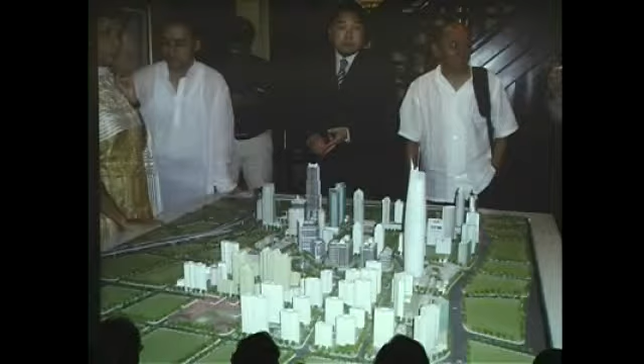Places like South Asia, Latin America, and Africa—well, this is the switch to China. China has already decided it wants to be a 20th century city, and no one told them it's the 21st century.

So it's countries like India, Latin America, and countries of Africa, through their lower use of energy and resource per capita, that are therefore more developed in a 21st century sustainable planning and design sense. But architects trained in mechanical thinking are lagging way behind.

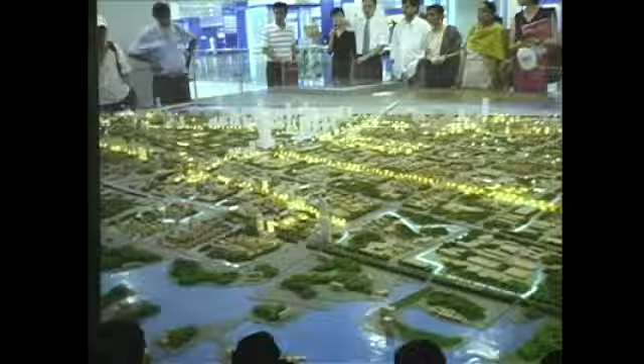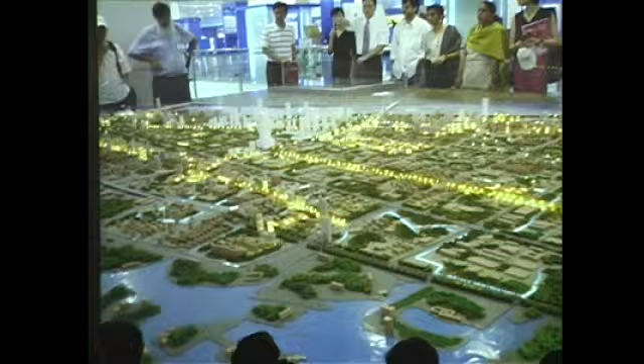How can architects participate in this enormous paradigm shift and change of modalities that will accompany what Ulrich Beck calls the second modernity? I would argue that architects must engage in new transnational scales of thinking and transdisciplinary modes of collaboration, and that's how I'd like to structure the research work I'll be presenting.

But this is the China we were shown. This is an urban management system where people with PDAs are running around the city looking for violations of public order, contributing to a huge database that's centrally managed and monitored. So this guy with his Gucci bags has to avoid the PDA and the photographers in order to continue making a living in this newly structured environment.

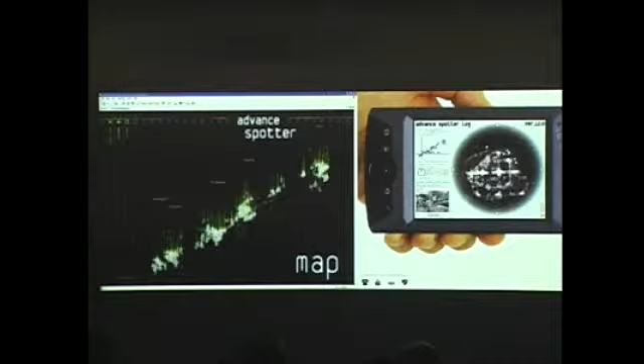This is a map of Boston to Washington. These are the tools that I think the 21st century architect has to operate within. So in order to make this leap from the handheld to the GIS reading of a region, we have to develop a theoretical framework to work with.

And so I'm a co-PI, a principal investigator within a science project with 35 different science disciplines represented, from hydrology to plant ecology to social sciences, paleobotany—there's some really interesting fields you've never heard of. And I'm the one architect on the team. They decided they wanted an architect.

And so what we're doing is developing a system for understanding the relationship to be able to scale up the community garden to the whole northeast forest. Because basically all the cities from Boston to Washington occupy a hardwood forest. When the Europeans arrived here it was intact, structured by watersheds, stream beds and watersheds along the whole thing. Every city you'll see has a river running through it.

And so this is the patch dynamic framework, the system we're working with. Of course I don't have time to get into the details, but just to give you a snapshot, the 5 color swatches you see are 5 land cover types. So it's a system that looks, instead of land use like planning has relied on before, it looks at land cover: building, pavement, bare soil, grass, and trees and shrubs. So these are the 5 land covers.

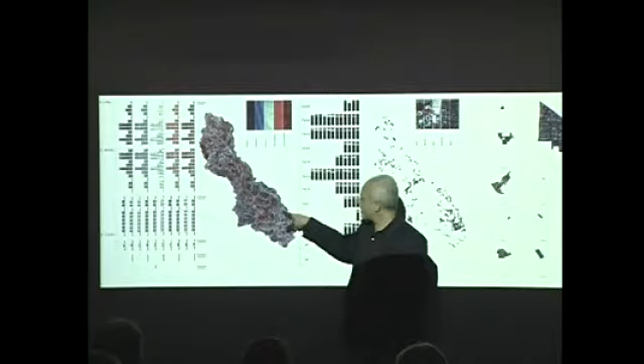And so this is a watershed, and it stretches from the center of Baltimore to the farms at the periphery that are rapidly being turned into subdivisions, big mansions. The Beltway kind of cuts through the watershed here.

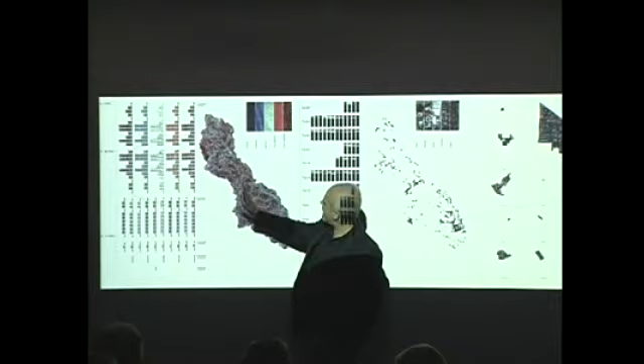You can see it cut in a straight line in half. And then there's a feeder expressway that was built more recently to allow those suburbs to commute to the Beltway, where the economy is. And this is a city with a hollowed out center, much like Syracuse, because of this highway structure.

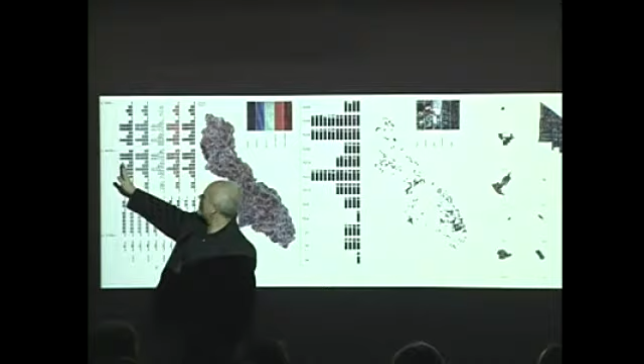Once we identify this combination of patches, there are certain families. This chart shows homogeneous and heterogeneous patches, going from built to vegetated. Different neighborhoods in every American city will be situated somewhere in here.

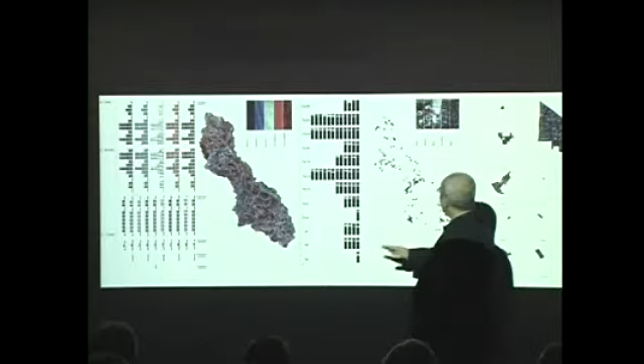These are all the patches dominated by the built fabric. You can see there's a lot in the inner city, the center city, but there are huge sections of highly dense built fabric way out into the suburbs. So this whole idea of a city being a center with a periphery doesn't exist in the American city anymore.

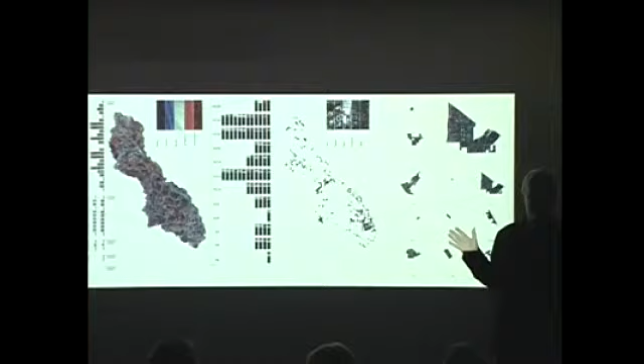That's what our research is showing. You have pockets of density as dense at the periphery as you have in the inner city. And then you have these huge things, which are malls, kind of in between.

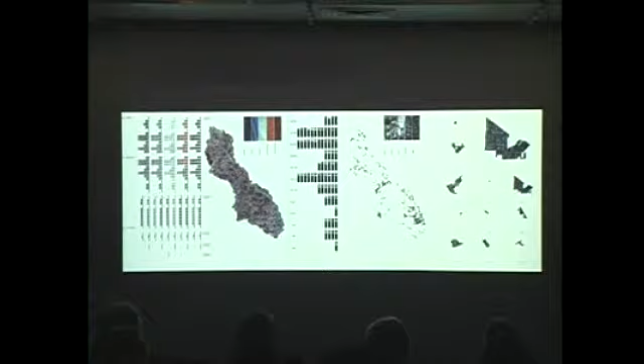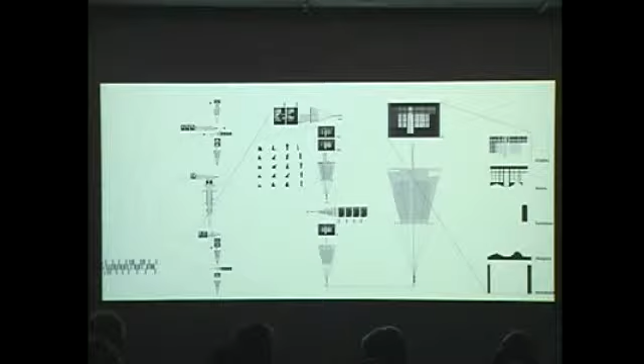Cinemetrics, I'll show you, is really working from the other scale. Instead of remote sensing down, it works from the body up and looks at our sensory motor apparatus and how we navigate through space in the world.

It's a drawing system I developed over several years teaching at Parsons and Columbia, in order to make architecture more responsive to human perception and interaction. Not as a static object, but as something that exists within this flowing matter flux I referred to at the beginning of the lecture.

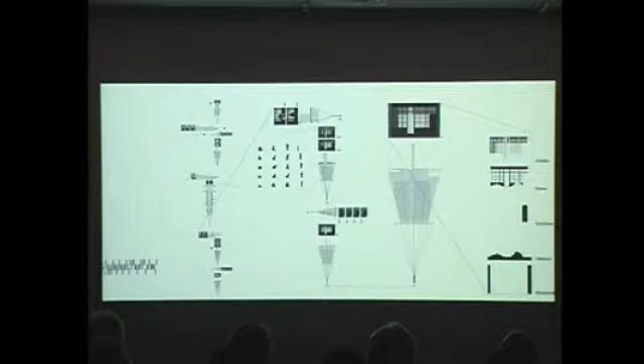So this is just a little biographical detour. This work started with the scientists. How did all the architects in the AIA come to me? Well, frankly, it's because of what Mark was talking about.

I went to architecture school. It wasn't enough. I got a graduate degree. It wasn't enough. I worked for Polshek for five years. It wasn't enough. I read something Goethe wrote in his Italian journal: I want to go to Italy and educate myself before I turned 30. So when I was 28, I went to Rome on my own, no fellowship, nothing. I just sat there for a year and tried to educate myself.

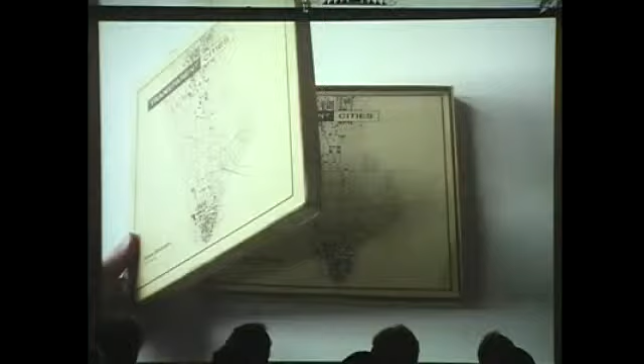So instead of being a receptor of knowledge, I wanted to produce knowledge myself. This is the book that came from it, on eBay for $500, called Transparent Cities. The reason is it drove the publisher out of business, because he had to print the box, the little booklet, and then these 24 acetate plates, which are scaled down, hand-drawn ink on mylar, like Art taught me, maps of the history of Rome and New York.

It really came from my education here. If you think about Collage City, but also Slutzky and Rowe's article about literal and phenomenal transparency, this was the inspiration for this work. But it really was my independent research that resulted in this.

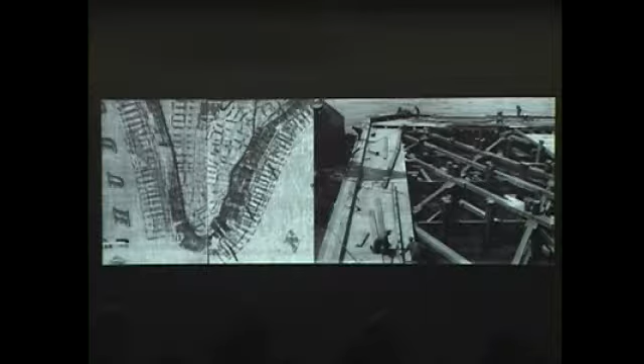The piers, the filling in of the water and landfill. And then the change in the city that's hardest to look at physically, but had, in my experience of living in New York for 30 years now, the biggest impact on the city: this transformation.

It was really down on its heels when Mark and I were at the Institute in '78, and it's really a radically transformed city because of this new technology.

So Transparent Cities, the project, looks at the archaeology of New York. I mean, we know the archaeology of Rome, but what about an archaeology of capitalism in New York? So we see the transformation of a port colonial city to an industrial city to a kind of post-industrial financial capital.

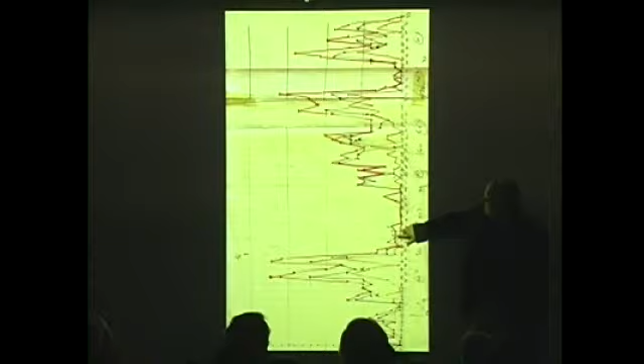Then this is World War II. The boom, the first boom of the roaring 20s, the stock market boom, the crash, '34. World War II - the only thing being built was Rockefeller Center, they still had money.

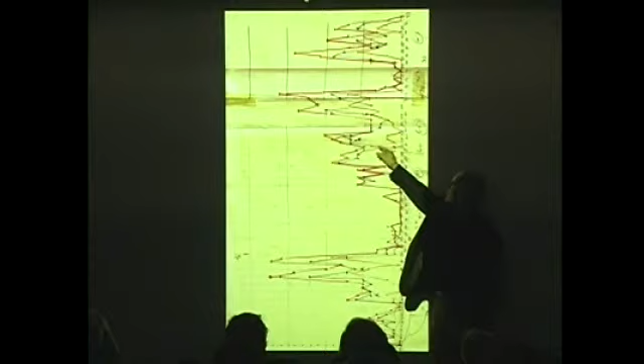And then it starts after the war. New York becomes the headquarters for corporate America, the suburbanization of America, so there's another wave and another boom. Then 75 - what happened in 75? Why did everything come crashing in 75?

Oil. OPEC - where was OPEC founded, in 1974? The price of oil crisis - New York and much of the industrial economies, these 20th century oil-based economies I described, were held hostage by the consortium of oil producers. So whole acres of real estate were abandoned because landlords couldn't afford to heat rent-controlled apartments anymore.

79, we get a big spike again. What happened in 79? Short-term memory - that stock market thing came down.

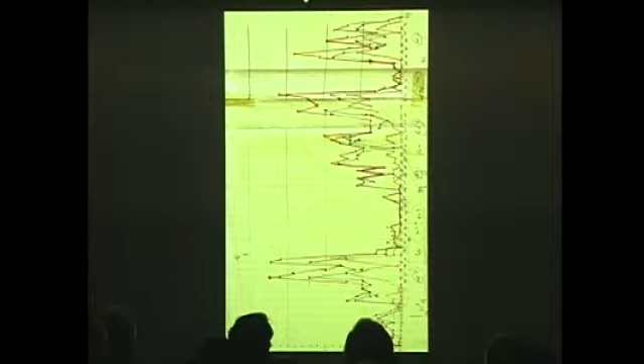So the only way New York and this economy was able to recover was this new technology. And we're struggling along because this new technology is so new, it hasn't really replaced yet.

So what I did, from that timeline, I made a computer model with time marked on the z-axis. In this computer model, you can interact with it online and look at the clustering in time. The timeline goes from bottom to top, and you can see different places in the space of the city where skyscraper office buildings were constructed. You see the boom in the 20s was really focused on Wall Street.

The post-war boom goes from 42nd to 59th Street and never below, even though the skyscrapers before that went along Broadway. So this is a kind of side view of Manhattan, where you can see space and time relationships, patches of skyscrapers.

So what happened is someone from the US Forest Service saw this online, because it was really remarkable. When you do an online project, you get an audience you never expected - so many people from all sorts of different disciplines contacted me about this project.

This guy from the Forest Service says, well, we're interested in mapping trees the way you map skyscrapers. It's a theory of patch dynamics - as ecological succession, as plant material, grasses or trees or vegetation grows, it happens in space and time in particular patterns, and we want to understand that.

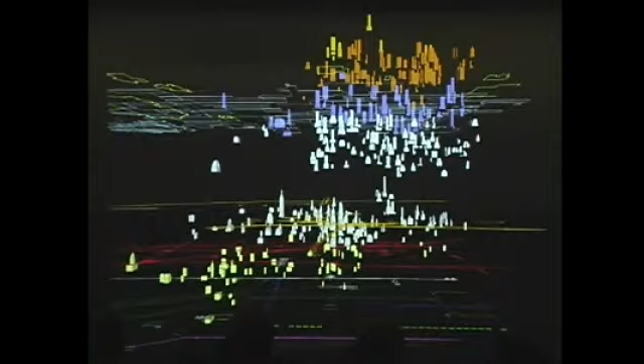So I was invited - thank you, Mary Kay, for the beautiful poster, and this is what that poster is all about. You kind of fly through, instead of a simulation of New York, this space. In that drawing on the poster, you're along 42nd Street, but you're in 1950, in that space of no construction, right before the post-war buildings start.

You can study the change of building skyscraper morphology through interventions of technology - curtain wall, air conditioning, urban planning guidelines and rules and things like that.

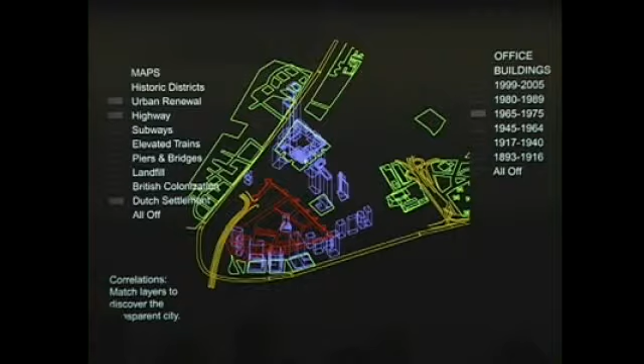While I was an architect very interested in the content of this project, a lot of people began to realize that it was a kind of information architecture - they were more interested in the form of this project as well as the content. That made me realize, as an architect, that there's a whole bunch of people out there with no sense of space, and architects can contribute a lot more than we currently are doing.

So that's online at www.skyscraper.org - join the millions and billions served who scan this thing. I get emails from all across the world still about this project. It's quite interesting, given the attraction of New York.

So with the Forest Service, we began to look at the trees in the entire country - it's a national Forest Service, part of the Department of Agriculture. The problem is, this is the pattern of different species in the US, but it's shifting. Climate change is causing all these species to come up the coast, at least in the Northeast, which is what we're looking at.

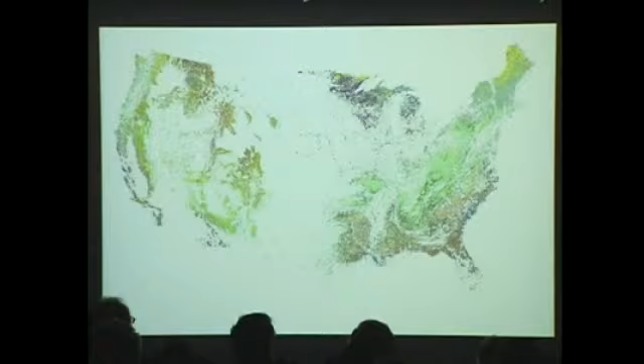If you look at the pattern of urbanization in the US, there are really only 10 regions in the country that are absorbing most of the growth. These are the 10, and they're megalopoli - larger than single metropolis cities. They're systems of cities attached by interstates.

Who is from the white space on this map? One, two, three, four - oh, quite a few. Who's from the colored spaces on this map? Yeah, okay, point proven.

So how do we put these two patterns together? Climate change, forest succession, and this new urban form I showed you in the Baltimore ecosystem study that is reaching along these highways and spreading at greater and greater rates. I am not a new urbanist - I do not want to force people to live where they do not want to live, like cities. I think we need solutions for every one of those patches, whether you live way out in the suburbs, inner city, in the middle, older suburbs, or newer suburbs. The variety is what interests me.

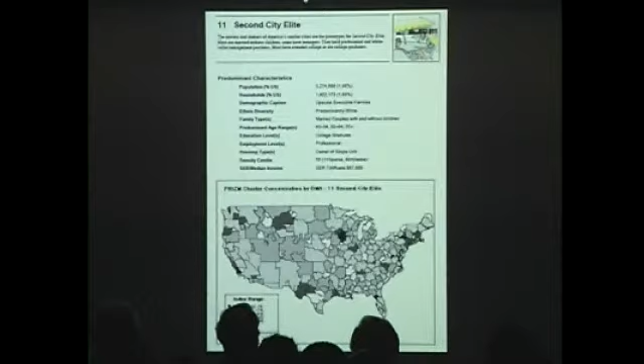This is a kind of mid-grain analysis, it's not very fine grain. You can get classifications of hundreds of different types. The data we work in is zip code specific, so it's neighborhood scale - this is county, so it's a little bit coarser. If you're interested, I can look up any of your hometowns in the discussion. But I want to move along.

In addition to working with the Forest Service, I work as a consultant for the Institute of Ecosystem Studies, which is in Millbrook, New York, right here. These are the 15 scientists working on this project called Spatial Heterogeneity, Mosaics in Landscape and Ecology. I mapped where everybody was working, and I told them they were all urban ecologists, because the problem is ecologists think they're in nature.

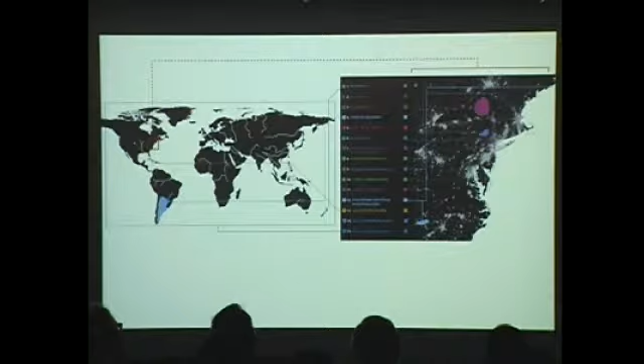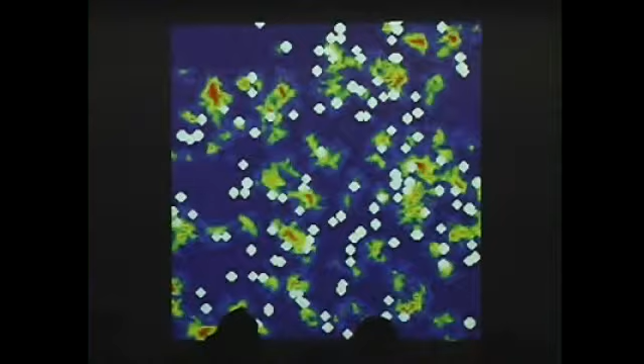The first thing is that there is no distinction between architecture and nature - it's just this mixed up thing, as you can see in the nationwide analysis and the climate change effect we've had on natural systems. Some of the projects are amazing. One guy chases gypsy moths, which love acorns and oak trees. If they eat too many, the oak trees don't produce so many acorns, and so the mice start to eat gypsy moths. They create these amazing animated models where you can see the gypsy moths, the mice, the oak, and the acorns interact. That's patch dynamics, that's spatial heterogeneity, created in time.

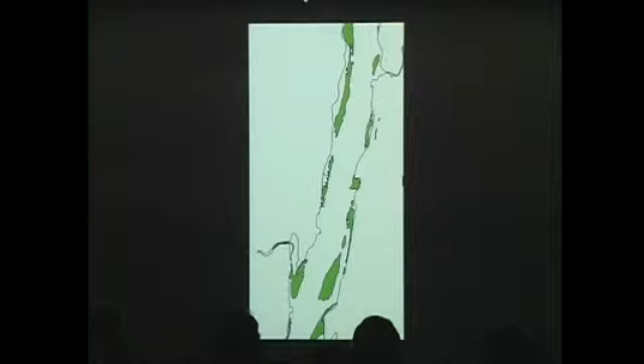Submerged aquatic vegetation, SAV - how grasses under the Hudson River grow and change depending on the flow of the tributaries and other kinds of forces. But the kind of structuring concept at this institute, because it's an institute for ecosystem studies, is the idea that comes from the Hubbard Brook experiment up in New Hampshire.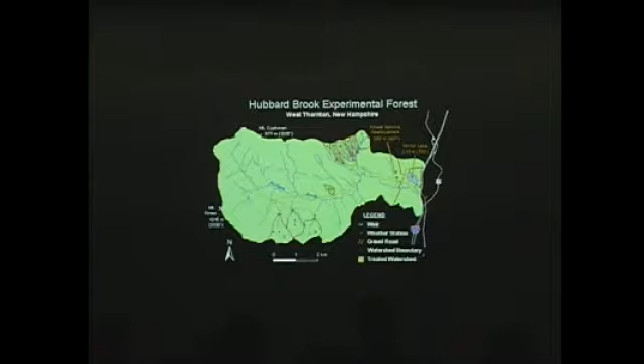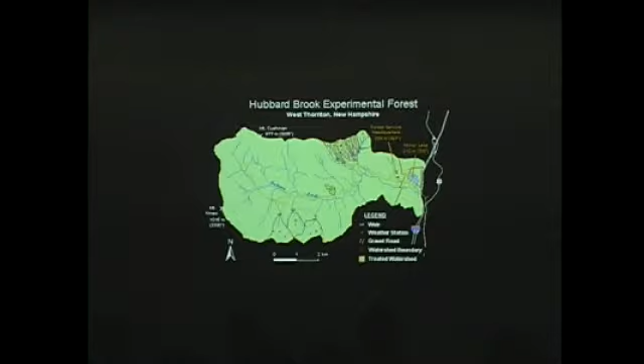The Granite State. So they found a watershed that wouldn't percolate the water down, but would run it off. So it's like a controlled experiment - they can test things. And this has been an incredible experiment because what they understand is the relationship between species. Before, ecology would just study one thing at a time. An ecosystem study looks at the interrelationship between things.

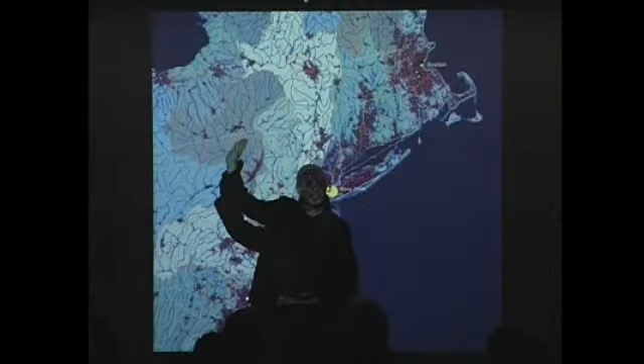So this is one of my students at Columbia doing a watershed analysis of the Boston-Washington corridor. For me, it's really eye-opening because now I understand why Werner Seligmann used to tell me that Syracuse was in the Midwest. Do you see why? Ithaca still drains to the Atlantic. Syracuse drains to those big Great Lakes, right? He was right.

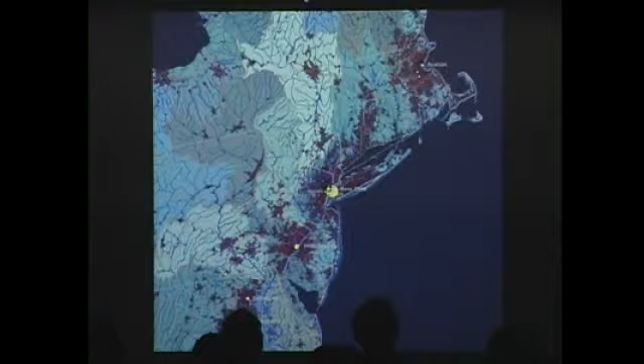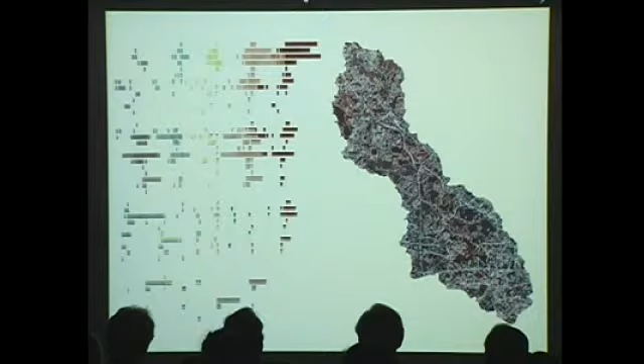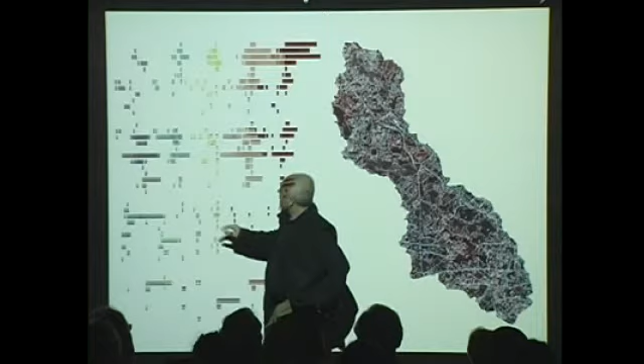And this is a drawing that shows the signature of Baltimore. This patch system works - you could apply it to any city, but every city will have its own signature. So what I'm modeling here is the number of patches of a particular type, and you can tell what type of city it is - it has a lot of forests and a lot of farms and grassland, and some urbanized area which have a certain percentage of trees and things like that.

So every city will have a specific signature, and the idea is to get people to understand themselves in relationship to this watershed, to scale up their imagination from the neighborhood to something larger than the city, which is the watershed that goes from the inner city to the edge city. The kind of political problems we have now, given this mentality of center city versus suburb, is something the watershed tends to break - it just looks at the social natural systems.

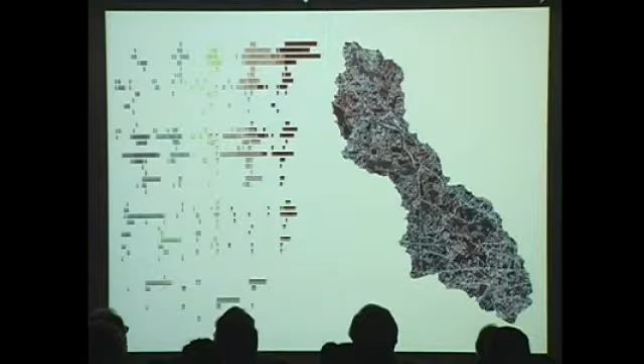So I don't know if you're getting bored yet, but it's so interesting what it reveals. The forest stuff is, of course, along the corridors, and the homesteads were around, so there's huge urban parks that protect that, and then some preserved hilltops, but everywhere else it's kind of very patchy.

And we talked about the building-dominated patches, but look at the pavement-dominated patches - these interstate systems and these huge malls with parking lots, and where they appear. And then the mixed ones, the older suburbs with mature trees.

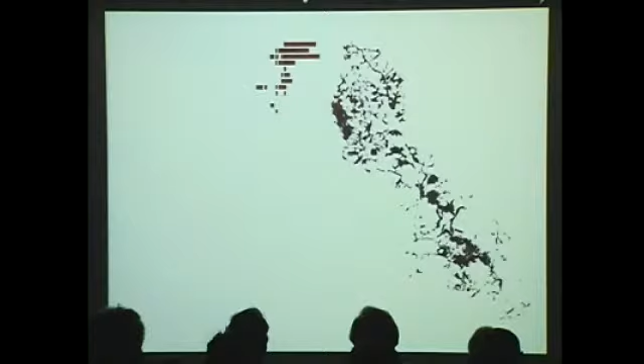And then looking at a particular neighborhood, let me go back if I can find it - in the city of Baltimore, an old brownstone neighborhood. One more. And so this is an inner city neighborhood that's mapped according to hydrology.

There are so many vacant lots in this neighborhood that you could construct a drawing based on, if you removed the storm sewer system, where water would flow through the neighborhood. And so that became the basis of urban design guidelines for this neighborhood, where all these community gardeners would understand their block and their neighborhood.

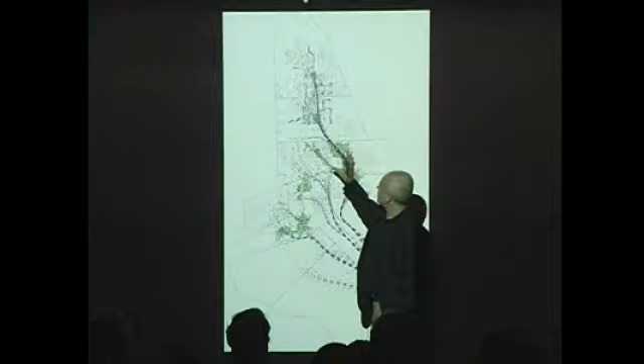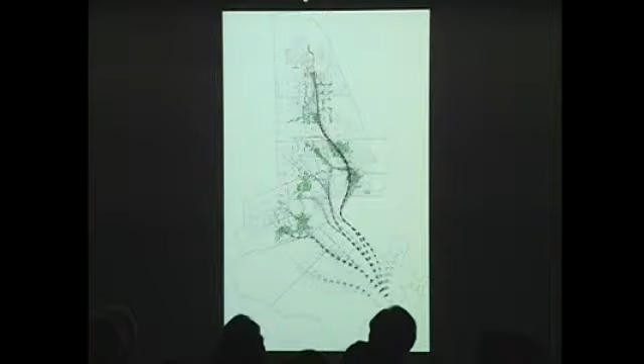I don't know if you can read this drawing, but based on where they were within this sub-watershed, this rainwater drainage system, they could construct a landscape that was species-specific for that particular area - whether it was something that would gather a lot of water and be wet, or something uphill that would be drier.

So these are the kind of models that, because again, you have to project these design ideas in time, and future models, the social actors - there's a network of business people and NGOs. And then scaling up, this is Mumbai, Shanghai, Boston, Washington.

Here you see the problem - these are the same scale. And we think of Shanghai and Mumbai as being mega cities, these are like cities so huge, out of control. But from space, they're very contained in terms of their imprint. This is nighttime imagery, and it shows where everyone has their lights on, right? And so, same scale.

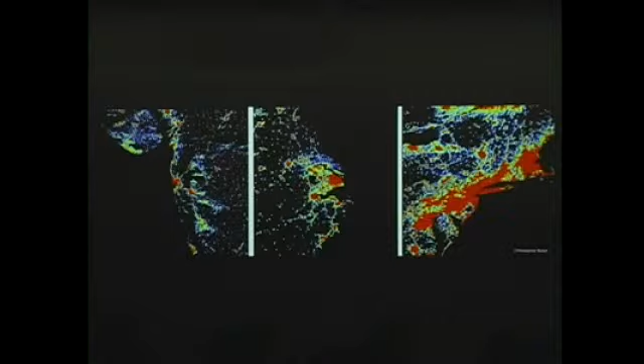About the same population in each square. China, you can see, is well on its way towards this model. India has a thing called democracy - it's getting in the way. They can't quite build the infrastructure to create that yet.

As a final episode, Mark mentioned I am working in Bangkok. I've been going there for 10 years, every year. It's a Delta rice growing culture, and this area, this city, became a great place for me to think about these ecological processes over centuries of urban form.

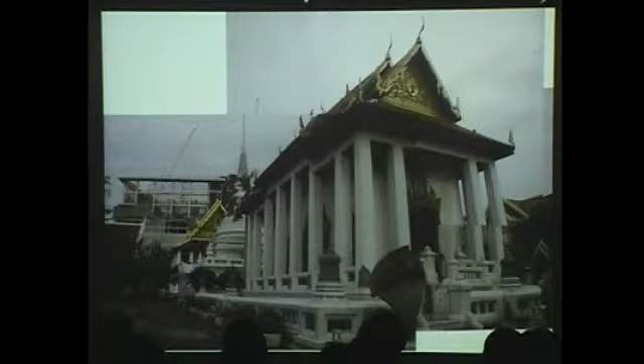But as you'll see, it kind of led me to shopping. I just wanted to go back to the architectural artifact and art and building to really underscore the point that I'm not trying to tell you to all be landscape architects or something.

So these are the shutters on this temple, which sits in the middle of all these shopping malls. This temple, with its carved shutters and mirror backgrounds, has monks circumambulating around these corridors, reflecting in these mirrors and thinking about the culture and Buddhism. And then the architecture of these new malls is quite spectacular, with LED technologies and glass and incredible intensity of imagery.

And in a country that has a monsoon climate, so 6 months a year it's wet and 6 months it's dry.

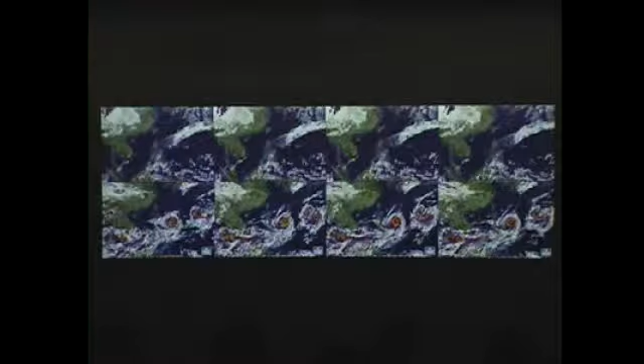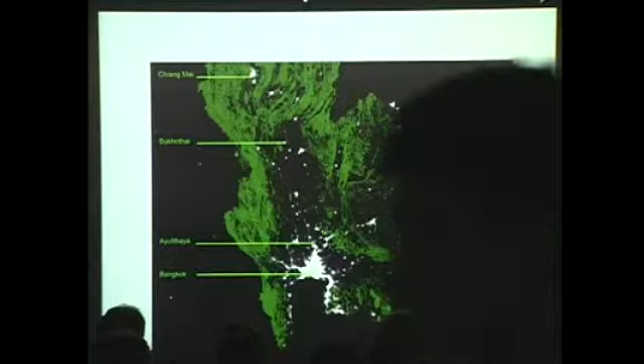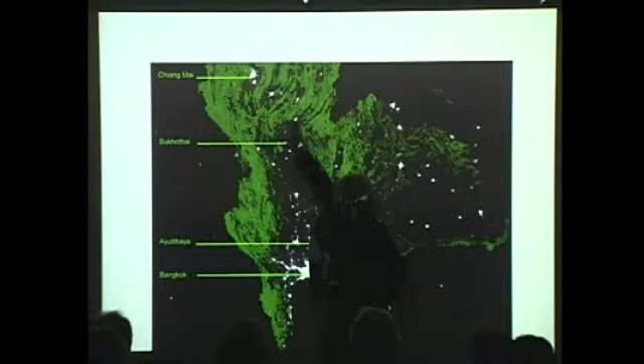This is the topography map over that nighttime imagery, and what I'm looking at are the historical capitals. So Chiang Mai was an older river valley capital. Sukhothai was a capital after Angkor was defeated. Ayutthaya was the capital of the Kingdom of Siam for about 300 years, and now Bangkok.

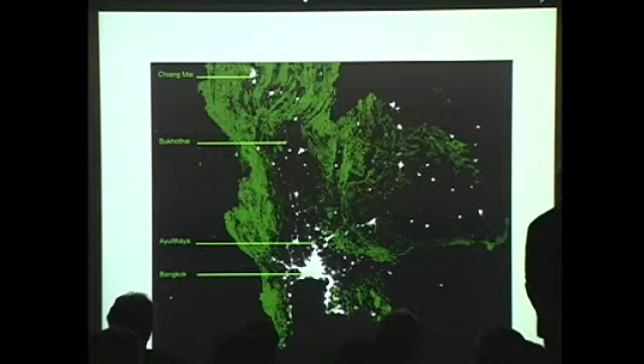And so historically, the capital has also come down the watershed. This is the new Perspecta, Perspecta 39, and these drawings were done for that - looking at how each of these historical cities were formed in relationship to water.

Sukhothai is in a floodplain, Ayutthaya is on the confluence, it's an island on a confluence of rivers, and Bangkok, of course, is a delta city. These are cities that responded to these local conditions, as opposed to Angkor, which is this amazing center of an empire that completely ignores any kind of local topography. It's this idealization of a cosmology located in the center of the country.

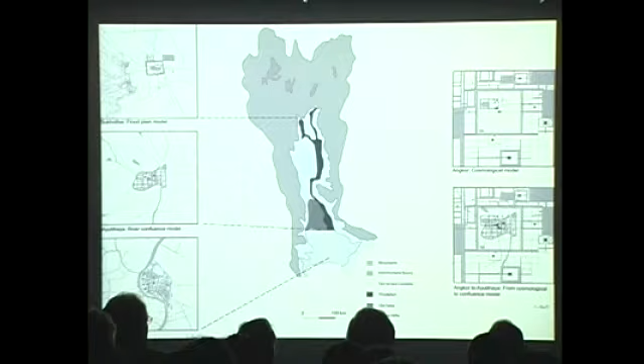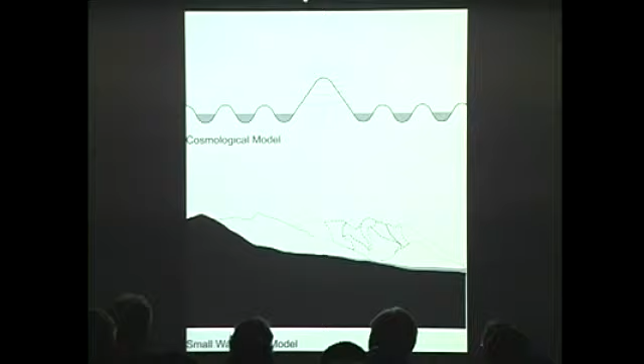So this is the cosmological model from Angkor, and this is our watershed model. I was kind of interested in exploring this relationship in Bangkok.

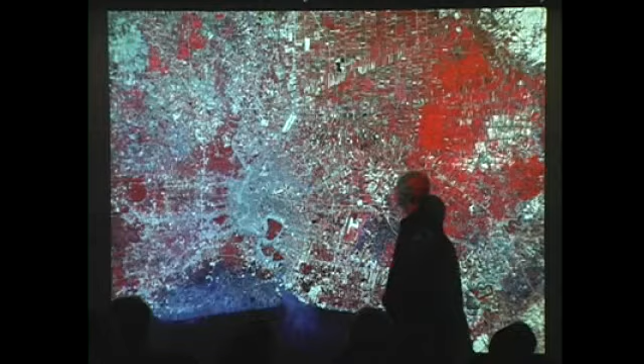Bangkok has rice paddies to the east and fruit orchards to the west, and they just finished a ring road that is eating its way through the rice and the pomelos and mangoes and coconuts. It's completely American-style urbanism - all single-family houses being built along this ring road.

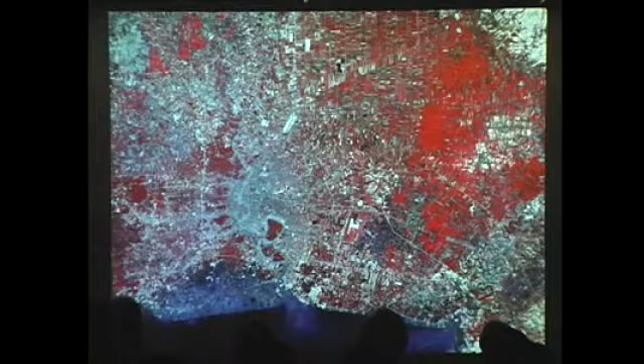With a colleague in Bangkok, we're looking at the satellite imagery every year, but then with his graduate students, we interview and do field checks in each of these different kinds of landscapes every year. The idea is to begin to monitor the relationship between micro decisions, when a farmer decides to sell his or her land, and the impact from space. That's this idea of close-up and remote that I talked about before.

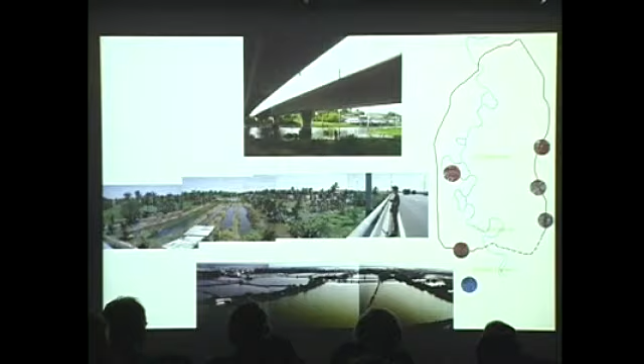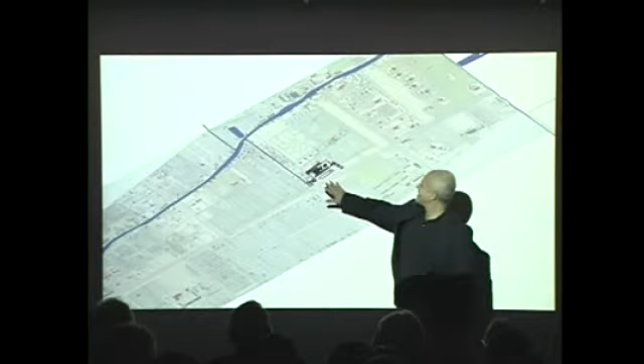These are some of those, which I'd love to talk about, but then back to the center of the city. Here's our temple that we looked at. So I said, okay, I understand the history of skyscrapers - what about the history in New York? What about the history of shopping in Bangkok as a patch dynamic system?

So this is the first shopping center in Bangkok. Chulalongkorn University is right here, and these are the royal rice fields that were given to the university. For its endowment, to keep it in shape, it built something with this new kind of idea that they got from America called park and shop.

Park your car here and shop in a little shop there - so this is park and shop. It also introduced bowling, the first bowling alley in Thailand, and air-conditioned cinema, the two first air-conditioned cinemas. This is 1964. Anything going on in Southeast Asia in 1964?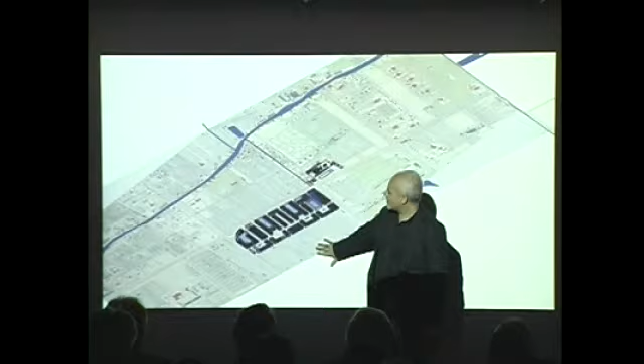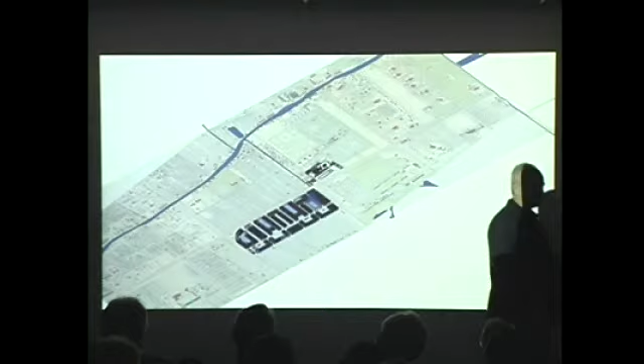Why would American shopping be built next to this Buddhist temple near the King's Land, near the university? This is the canal where they used to come to the temple by boat, and the lotus gardens were here. Why would they be interested in parking and shopping in 1964?

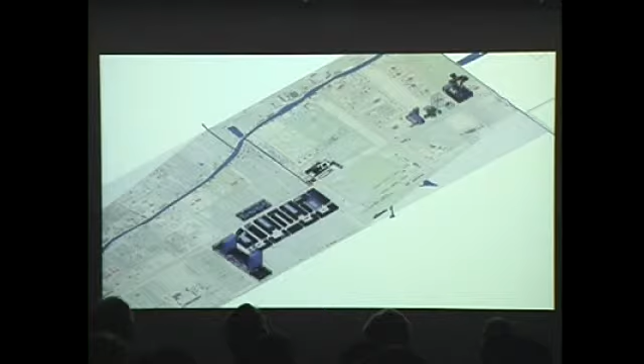So this is smaller properties you can see. Smaller little shopping centers are built in the 70s. The first indoor air-conditioned atrium escalator shopping center was built in 1974 across the street from Park and Shop. Then the first mixed-use mall, hotel, 6 levels of shopping, office building, MBK Center built there. The first department store here.

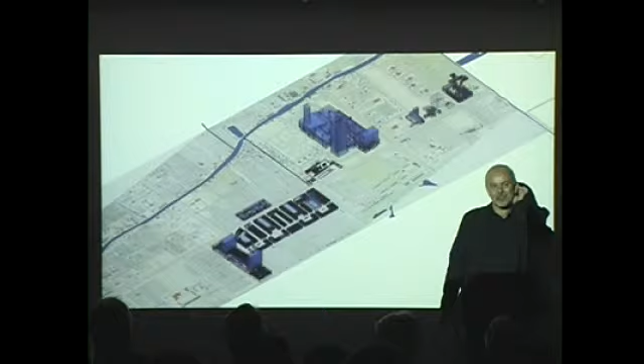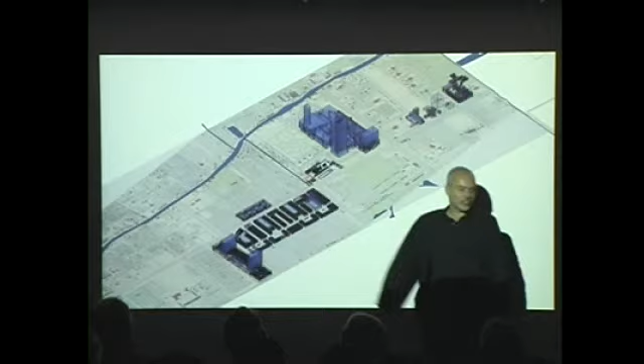This small - you know how they built the tallest building right before the economic crash? This was planned for even the biggest mall. 1990s, '95, '96, economic crisis, 1997 - the same effect that the stock market crash had in the US in 1929. In East Asia, the baht devalued, the whole country, all the construction sites were halted. And so this tower here is a concrete shell for about 20 years, but the mall did manage to open.

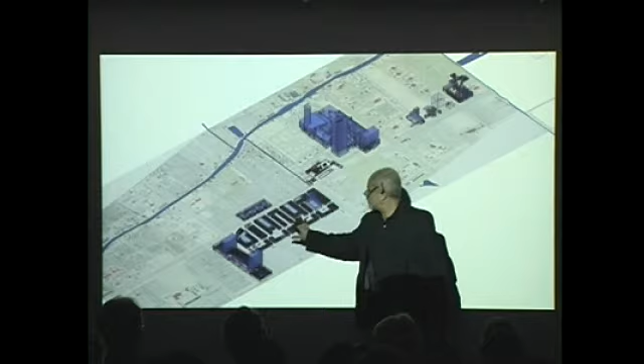It started to densify with some more hotel and other shopping centers there. In '97, that's the last one before the crash. Then what happened?

They decided to build the mass transit system. So this is the SkyTrain, the BTS SkyTrain in Bangkok. Opened in 1999, December 1999, in celebration of the millennium. And it became this symbol of revival. Instead of just going to one place, you can get on your cell phone, your friend was in the department store and you were in the mall, you could hop on the train and go there.

So it's quite remarkable this developed as a three-dimensional over-the-street armature in the city. There are two lines in the SkyTrain. One goes like that, one goes like that. So there's these two things passing each other. And for 1 kilometer they join, so there's one central station which transfers here.

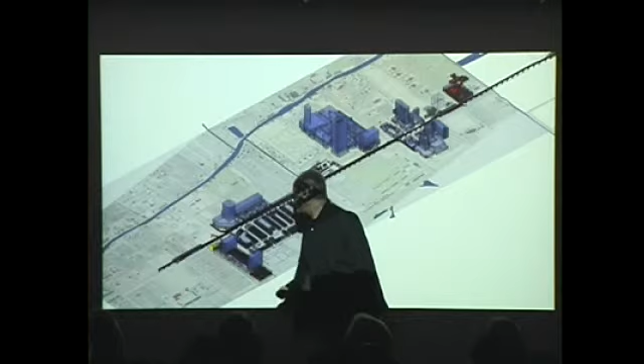So what happened is the mall started to renovate, and they turned themselves inside out. They created plazas and second-level connections directly to the SkyTrain. So first was this MBK Center, then the department store. There are 3 stops here in the train - 1, 2, 3. So this one plugged into that stop, this one plugged into that stop.

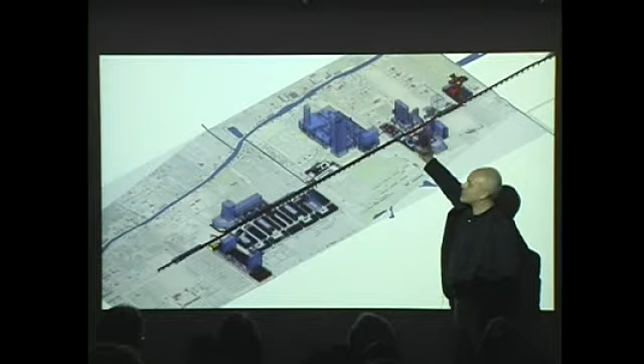The smaller ones formed a business improvement district, and they built a walkway here that connected. That first atrium one got connected. And then a new mall got built. And when they built this new mall, they had this great idea: we'll turn the mall inside out. So the atriums and the vertical circulation, the elevators, are on the outside instead of on the inside.

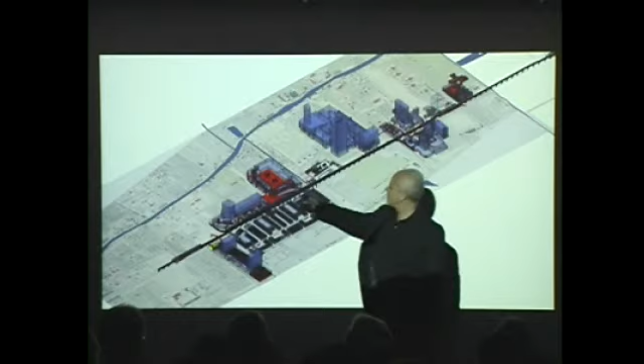And so the station turns into this incredible space where everyone is on these multi-level train platforms, going up and down the escalators. The Thais were quite amazed - they said, wow, we have a city just like New York or Paris, we have urbanity. We can go to a place not with shopping in mind, but just to hang out and meet. So it's quite amazing, the emergence of this space, which wasn't planned. Obviously the SkyTrain was planned, but this wasn't conceived of - it just kind of happened.

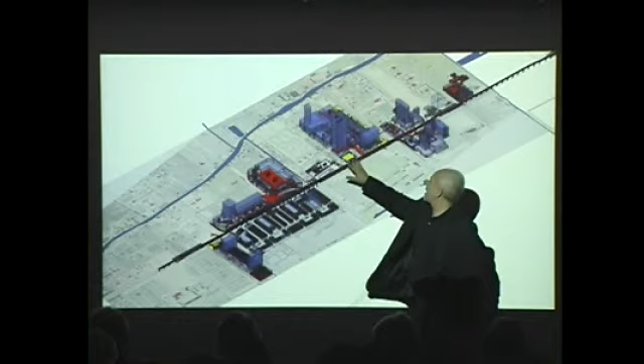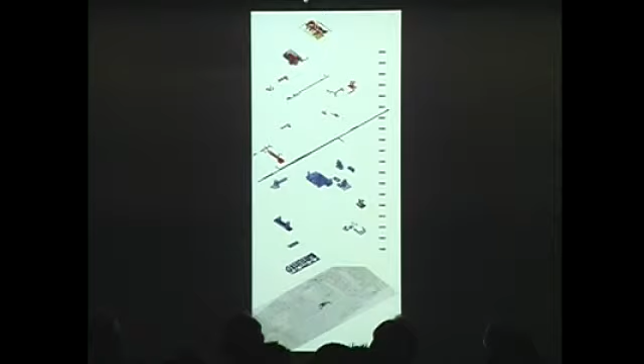They finally renovated this tower, and completely renovated that mall. It's now the largest shopping mall in Southeast Asia. And so this is the timeline I'm working on now for this new book that Mark talked about. You can see both the financial crisis and the infrastructure, and the transformation from the enclave city to the armature city, to use Grahame Shane's recombinant urbanism language.

So this is a little fun SketchUp model I did with students there, and we're able to cut through this city, because it's the Asian city. It's like these dream cities of Hugh Ferriss, multi-level public space - not quite, semi-public in some cases, but a lot of these spaces are outdoors and freely accessible. So basically that whole kilometer you can walk now, and you can go from the inside of one mall through the whole exterior space above the street level.

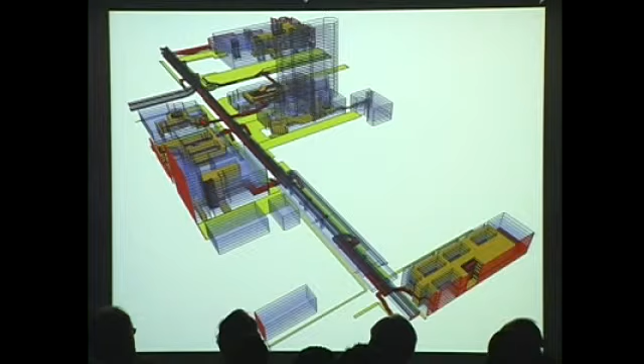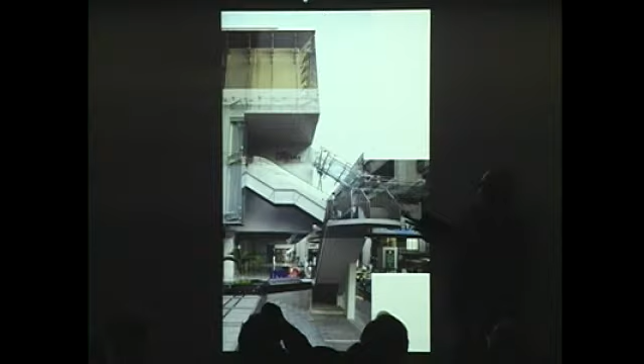So this is our Nolli model of this armature. And then some of the architecture—you can see the renovation of that 70s building with the new glass wall and the new bridge that was created to the SkyTrain. This is the SkyTrain.